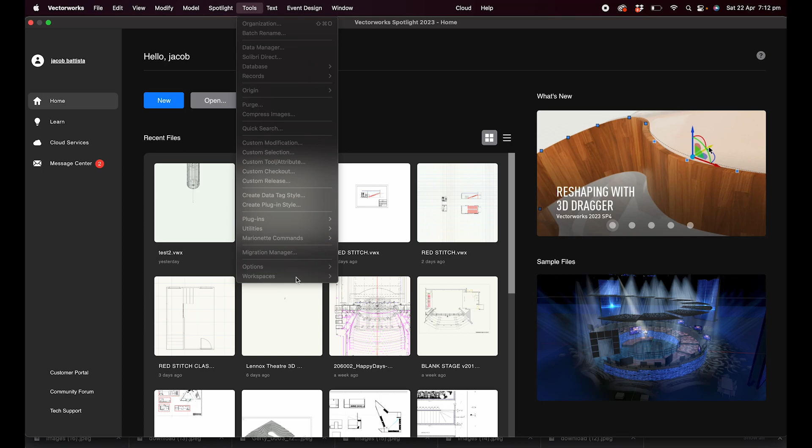So we've opened up Vectorworks, we're in our Spotlight mode, and if you want to check that, you can make sure you go Tools, Workspaces, and down here also Spotlight. But we're going to click New. Create a blank document, use document template. I'm going to suggest we use document template blank metric and click OK. And this is straight away going to open up a blank document for us.

Sometimes some people don't see this grid and they see a page in the background or page size. First thing to do is check that away, and if we need to get rid of that, we're going to go File, Page Setup, and untick Show Page Boundary.

So we're here and we are ready to set up our drawing and set up some classes that we're going to work with.

The first thing I want to do is set my fill style to class style, set my fill color to color by class, set my pen to class style, set my pen color to color by class, and set my line weight to class thickness. This will just allow anything we do when we set up our classes to carry through over here with this style of drawing. I'm now going to set up some classes.

I'm going to click on the Classes button, which will take me to my organization palette. We can also get here by clicking on the Layers button. I'm going to click New.

This is just going to be a simple drawing, but if you're doing a more complex drawing and setting up more classes, you can set up as many as you want. For this, I'm just going to type drawing, and this is going to be the layer I do most of my drawing on. And I'm going to click OK.

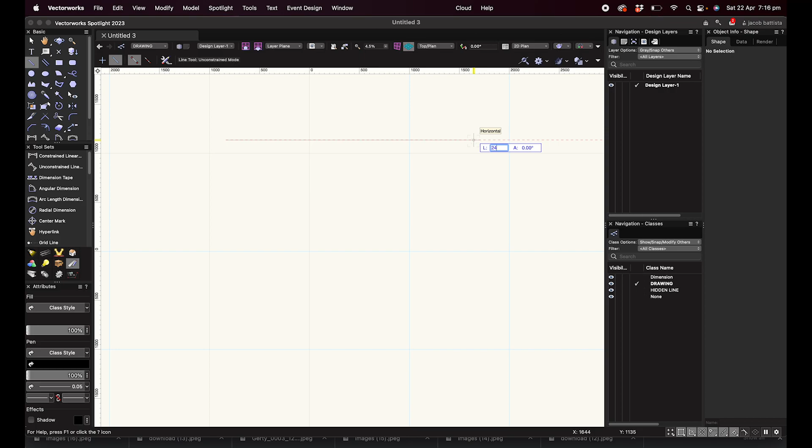The first one is the line tool. I'm going to select it, this is the line tool here. Drag a line across, I can drag it any direction I want, and I can set its length by dragging it out, or I can hit the tab button on my keyboard, type the amount I want, type the angle I want it at, hit enter twice, and that will draw my line. Now you can see my line has been drawn outside of the area I'm looking at.

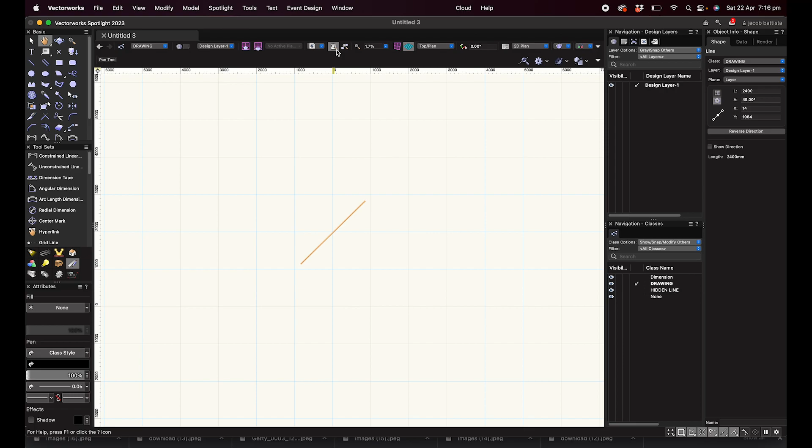I can simply zoom out and pan up. I'm using a mouse, so my zoom and pan is built in, but you can zoom out using the zoom tools or just by scrolling out, and you can pan using the hand tool over in our basic tool set. Remembering that most of the tools we need for now are in our basic tool set over here. I have this selected, so I can also zoom to page area, which is in the incorrect spot, but I can zoom to the item I want and it'll zoom it, or zoom to fit to objects.

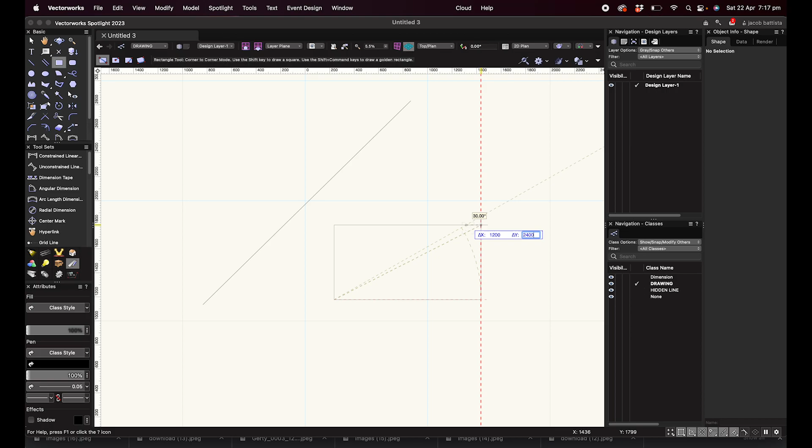I'm going to keep drawing. The next thing I have to draw is a rectangle. There's different modes up here we can use to draw the rectangle. This one is diagonal point to point, so I'm going to click once, pull out. This can be, say, 1200 wide by 2400. Remember, I've gotten to editing these by once I've clicked once, hitting the tab key and beginning typing, and hitting tab to move to the next setting. Enter, and there is a rectangle.

I can draw a rectangle with rounded edges, for example, that was that next tool. I can also draw a rectangle from the center out. So for example, if I find the center here, I'm just going to click, no. If I find the center here and draw out, that's going to draw me a rectangle from that there to there. I recommend you have a play with the different ways of drawing rectangles. I prefer to use corner to corner mode.

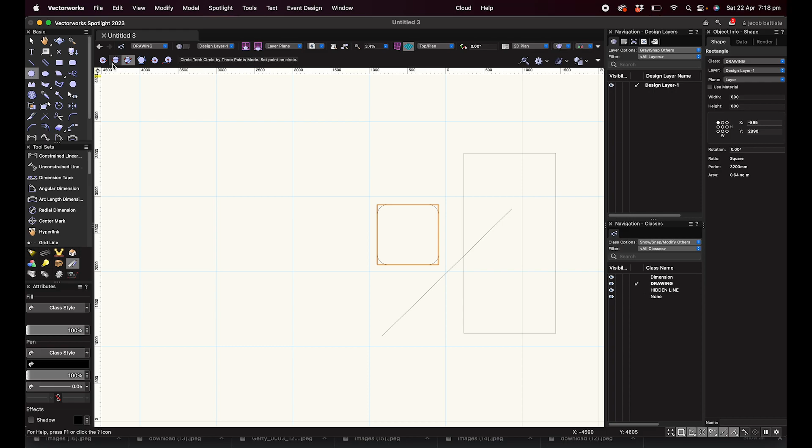We can then draw a circle with the circle tool, clicking in the, I'm just going to move to the first tool, radius mode. Clicking in the center and working out where I can set my radius. I want this to be a 1200 millimeter radius circle, and that's it there.

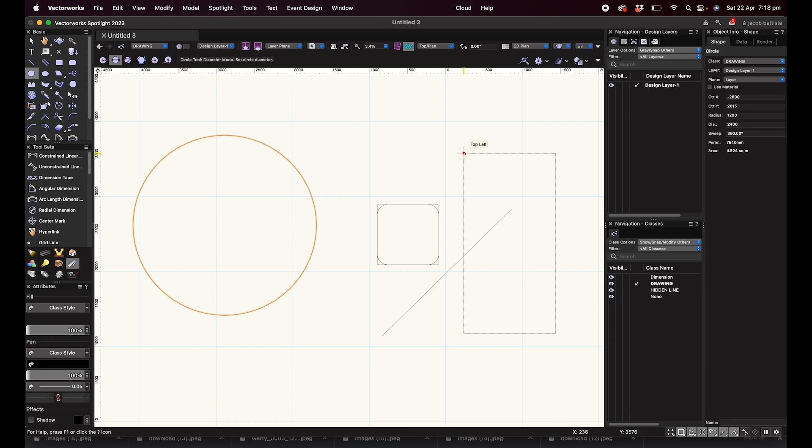I may want to draw a circle from here to here, knowing that those are my extreme points. I can move to my diameter mode, where I start there, pull and drag and click across, and that's going to do that. They're just a couple of the modes for the circle tool, but they are useful.

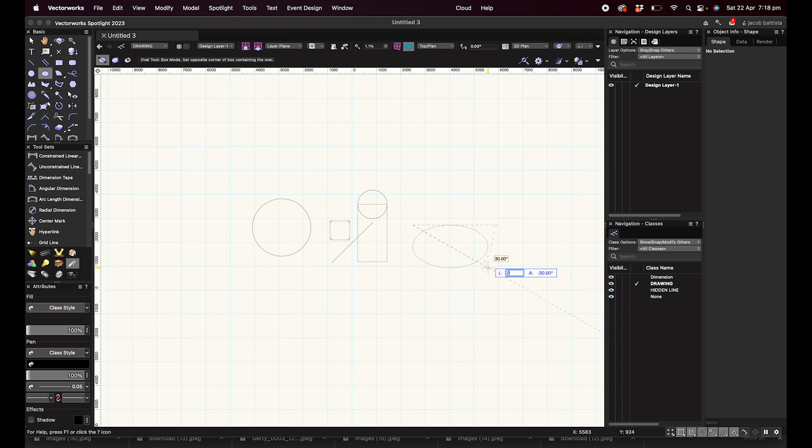I'm just going to zoom out a bit more so I've got some more space to look at how we can draw some things. The oval tool. The first option here in our oval tool is diagonal points, where we click across and we go diagonally and create. I'm going to go 3000, and that is going to create an oval that size.

That mode can be a little hard to operate. I prefer to use height and width mode, which allows me to have control, and go, I'm going to draw an oval that is 2000 horizontal and then 1000 in the vertical. That gives me a little more control over the overall size of my oval, for example.

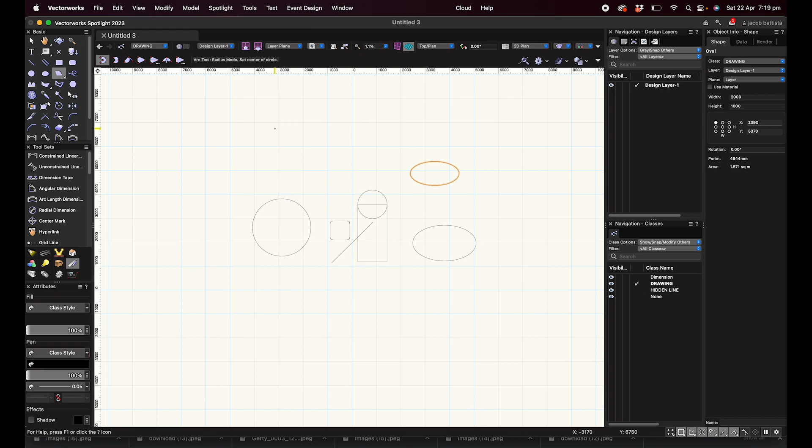The next is my arc mode, or my arc tool, which is where we can draw different types of arcs. The first one is radius mode, where I select the center and then move across, select the width or the radius, and then I can stop at any point along there. This is good for door arcs or anything where you know where you want to start, move across, and then go to.

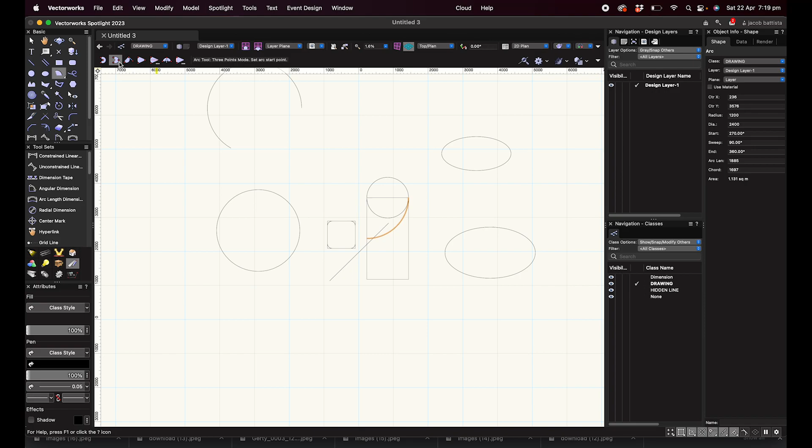The next is the 3 points mode with the arc tool, where we select 3 points and it will create an arc that works between those 3 points, using those 3 points as the handles or anchor points. There are lots more different types of arc modes you can use, and I suggest you go and play with them.

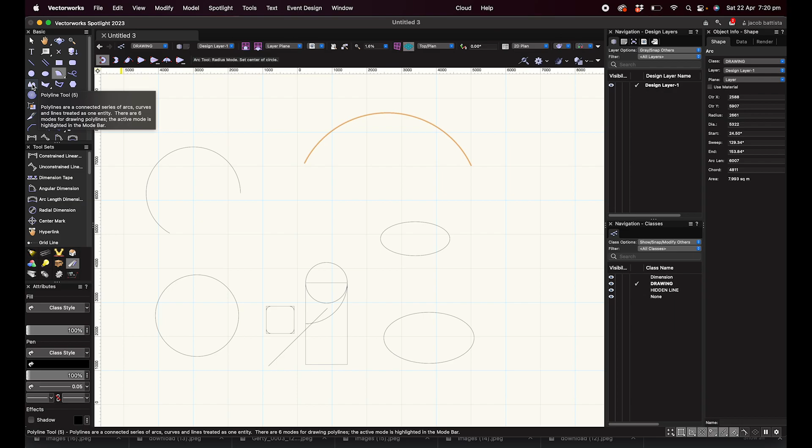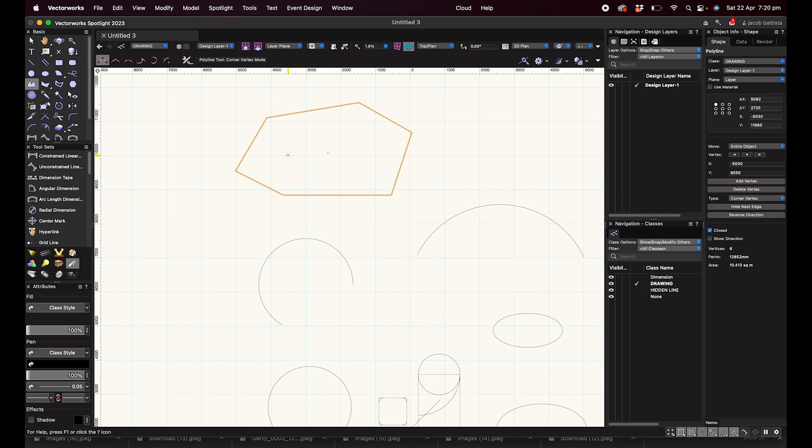A couple more drawing tools that are quite simple. Our polyline tool allows us to draw a shape using a series of straight lines and arcs. For the first example, I'm just going to draw a custom shape using a selection of straight lines, starting and coming back to the endpoint, and you'll see that's created one shape. Remember, we like to use closed shapes, so in the future when we work into 3D, we've got these shapes that we can automatically build up and edit.

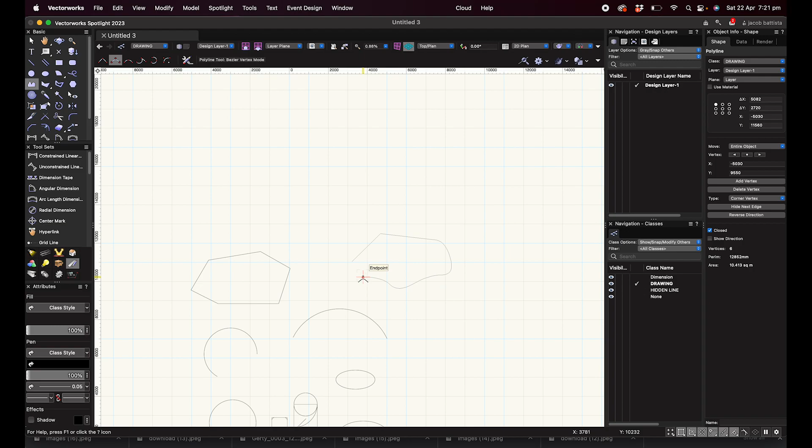The next one's a bit difficult, but you can give it a go. Using the polyline tool again, I'm going to start a shape, then click the radius mode, and after my next click it's going to start creating handles or anchor points where I can use my radius from. If I come back, that's created a more organic shape using a series of radiuses. Again, having a play with these tools can't hurt, finding out how they work.

The last tool, or one of the last tools, is just the 2D polygon mode. It's much like the polyline tool, but it just doesn't give me the opportunity to ever go into an arc.

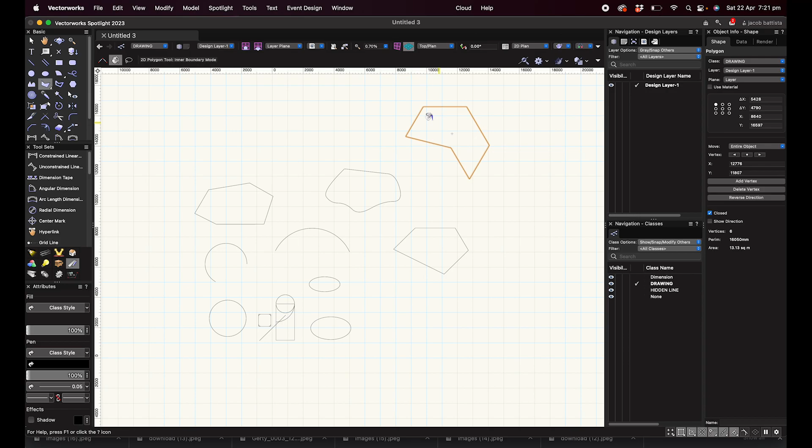But what it can do is I can draw, using my line tool, a series of lines that make a shape, and then if I come to my polygon tool, using the fill bucket, and click in between, that is going to turn that series of lines into a polygon for me. So that is a useful tool to come back to and use once you've done something and want to create a polygon out of it.

The last tool is the regular polygon tool, where we set a number of sides. For example, here with 3 sides, we're going to draw a triangle, and the first mode is inscribe mode, which means it's going to have it inside the radius of a circle. Then if I change my sides, say I want 8, and use circumscribed mode, it's going to have it outside the radius of the circle. But because I've chosen 8, it's drawing me an even-sided polygon where I have control over the radius size.

So those are some of the tools we can use to draw things with. Next, we're going to look at tools we can use to alter. The first one is the fillet tool.

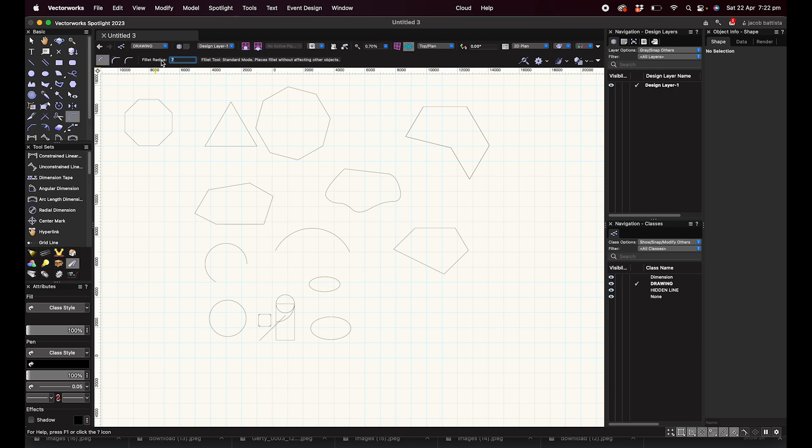The way we use the fillet tool is by selecting it, selecting a fillet radius. I'm going to select 300, just because I know some of these shapes are pretty big. Then I'm going to come over here to this shape and curve or fillet this corner. First, I select the first line, then the second line I want. This first one has left that original section there. If I change here to trim mode, the next one I do, it's just going to trim the excess lines. Oh no, it's not - it's going to leave it behind.

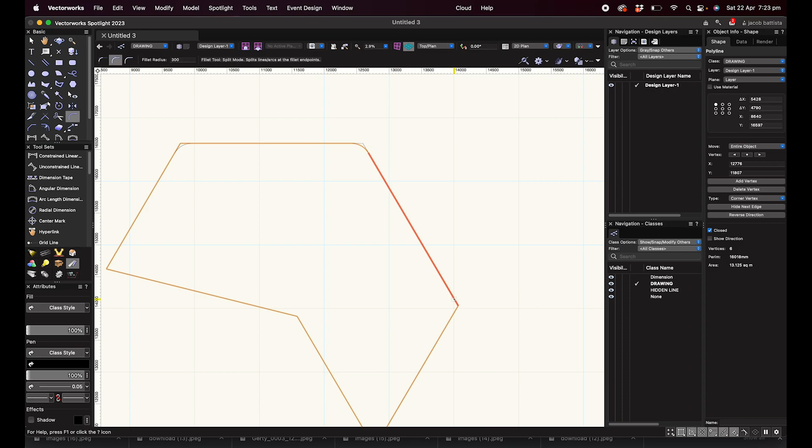It's because of my lines underneath from my other shape before. Let's go to a shape we know has no other things. This one here, trim mode, is going to trim the lines and just leave me with the shape I wanted.

Chamfer is very similar, however it's going to do it with a straight line instead of a curved line. So I'm going to go 200 by 200, or 200 by 100, and you can see how the chamfer mode gives us some control over the depth of our cuts. It's uneven, so it's gone 100 here, 200 there, because that was the first line I clicked and that was the second line I clicked.

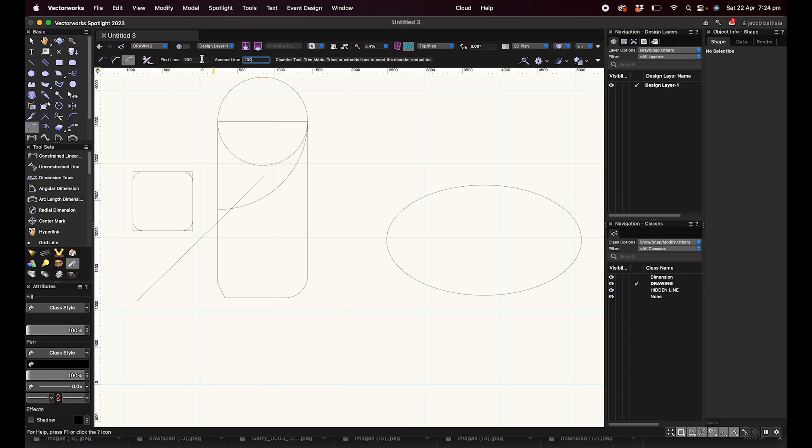I could set it even, 200 by 200, and find another shape that I want to chamfer. Here we go, over here - and it's evenly chamfered those corners there.

The next tool we're going to look at is the offset tool. I'm going to select this circle, and here is the offset tool. I want it to be 100 millimeters bigger, so I'll set my distance, and it's going to go on the side I click. I want it bigger, so I'll click on the outside of the shape. If I wanted it smaller, I can come back to the offset tool and click on the inside of the shape I want to change.

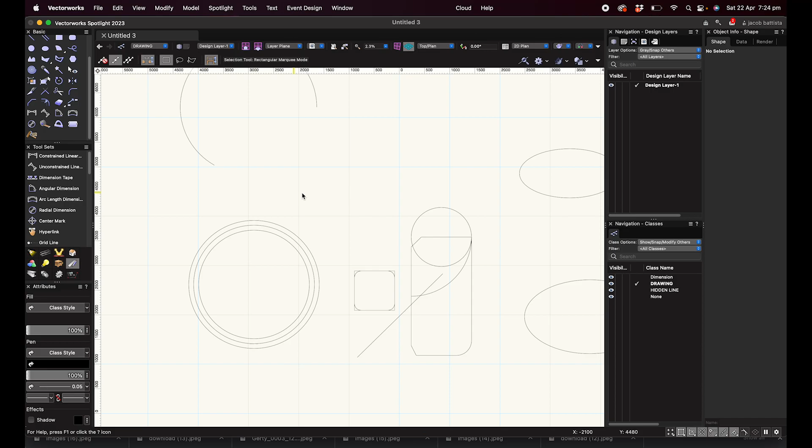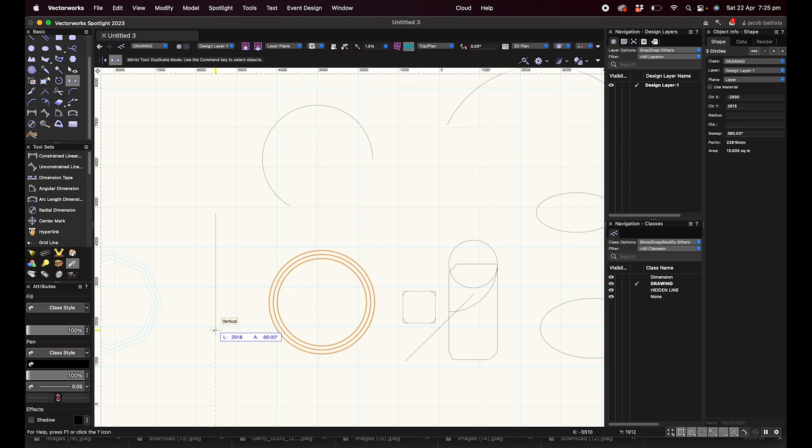So, a few more tools. I love these 3 circles, and I want more of them mirrored directly opposite. I'm going to select them, use the mirror tool here, and click once and click twice in the direction I want to mirror it. Imagine that this line is the mirror it's going to bounce back off of in a way. There we go, and now we have more because I have mirrored them.

That's useful, for example, if you're drawing a table. I quickly draw a table, and I've gone and drawn some legs on the inside. We're just going to zoom in here.

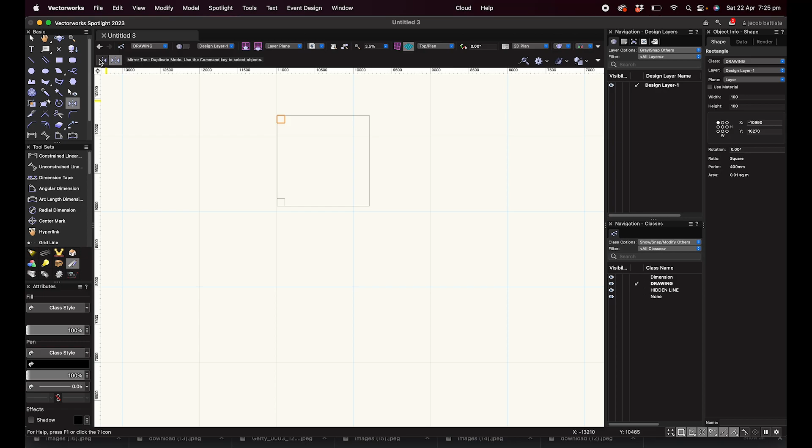And I want to, with that selected, mirror that perfectly to the other side. I'm going to use my snapping to find center, go across, that's done. I can also mirror it and not retain the original object by changing my item here. So if I do that, that's just going to move it across. But we want to retain that object, so we're going to do that.

And then we can quickly work our way around the table, mirroring in the direction we want, and there are hypothetically 4 legs. We know those legs are underneath, so one of the things we could do right now is move them to our other class, our hidden line class. I've selected them here, and in my object info palette, I'll go class, hidden line.

But one of the things I know is that I would like this to be a bit bigger. I could use my offset tool, or I can come over into object info and change it. I want it to be bigger on all sides, but I want it to edit from the middle. Remember, these 9 dots are the anchor points at which we can edit from when editing some of these things. So I'm going to select the middle one, and make it 1300 by 1300.

100. And that is going to quite accurately, using that middle point, change the size of that rectangle. So these are some good little tips and tricks of things that we can do.

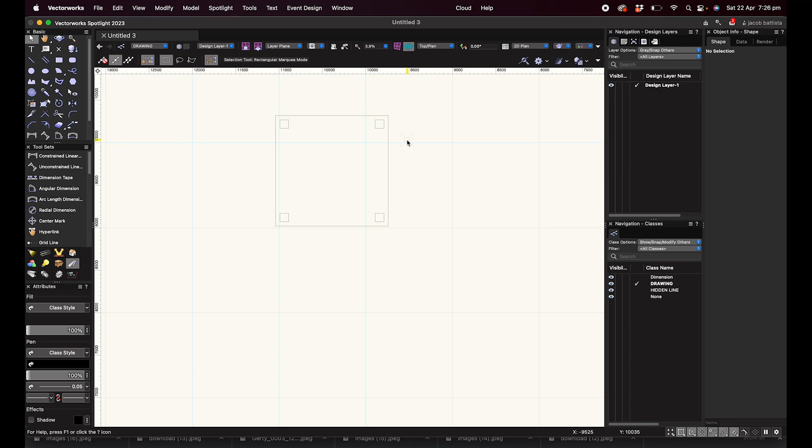One of the last things I want to show you today is how to use the move tool. So this is great, I've drawn my table, but I actually want it to be on the inside of this circle here. Hypothetically, this could be 3 steps in a platform, and this large table is going to go in the middle of it. So I'm going to select this and use my Move by Points tool.

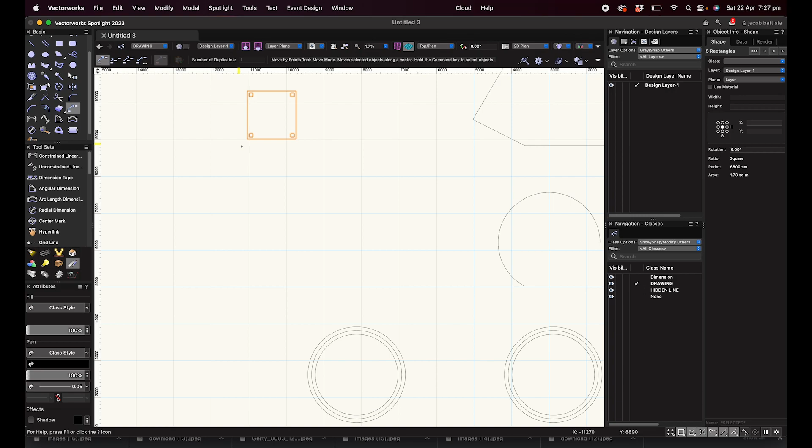Remembering that this tool has lots of ways we can use it. The first is just a simple move. So I'm going to use my snapping tools to find the center, and then find the center of that. So I've moved that table into the center of my circle.

This time I'm going to move it over into this circle, but I want to duplicate it. So I'm going to go to this mode here, which is the move and duplicate mode, and I just want to make sure this box is highlighted, object retention mode. That's going to leave the object where it was that we're copying. Center across. Now we've got 2 of them.

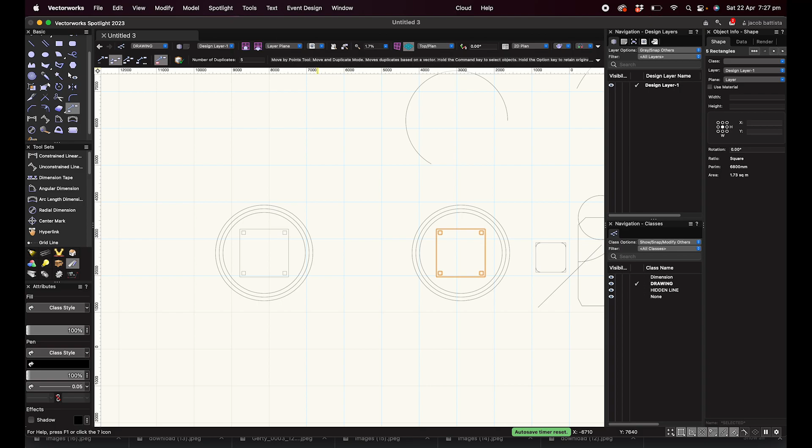This is getting pretty easy. I could want 5 of them. Number of duplicates: 5. Center. And if I go this way, I want them to be 3,000 millimeters apart. Enter. And that set me up 6 tables, or 5 because I duplicated it 5 times apart.

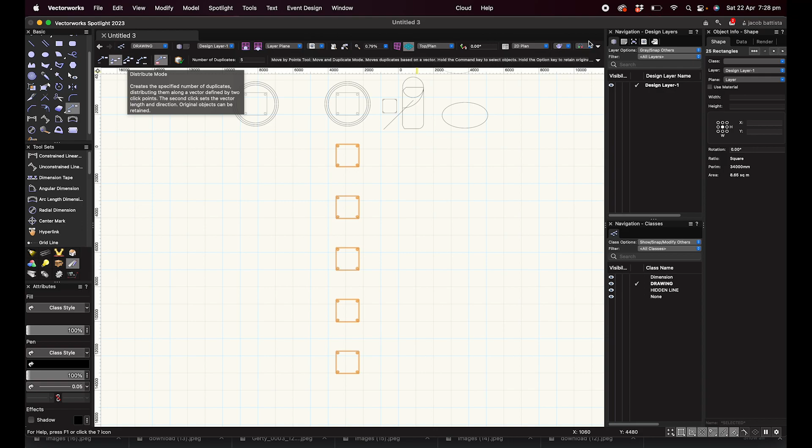Thank you for listening, and that is how we use some of our simple Vectorworks tools.